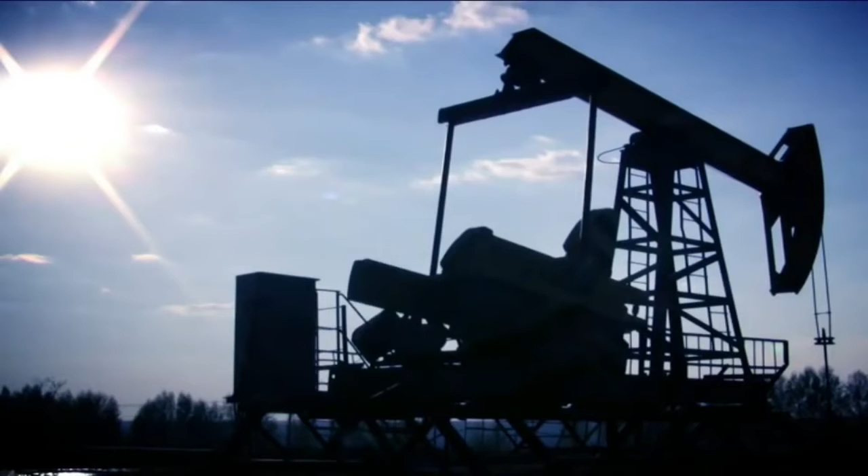Municipal solid waste management is recognized as a major challenge. Landfilling as the primary means of solid waste disposal is becoming a very serious problem and only represents a short-term solution. At the same time, we continue to overuse and rely on finite natural resources such as coal and oil. The burning of fossil fuels has also been linked by scientists to global warming.

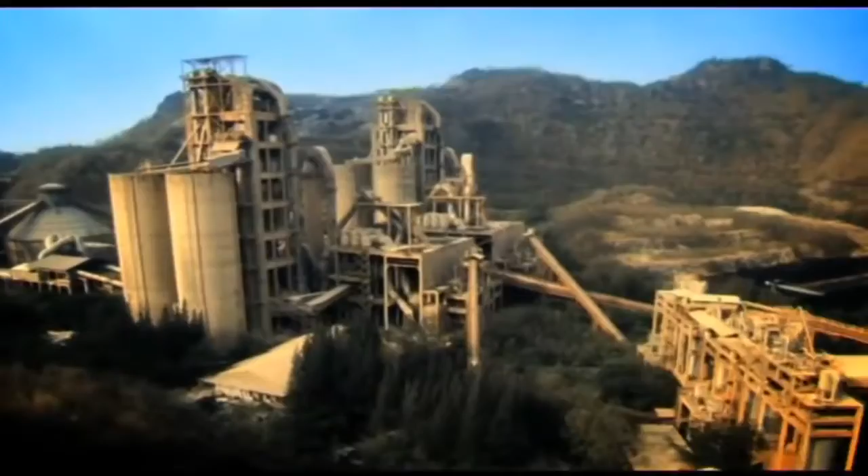Around the world, cement manufacturing accounts for about 5% of all CO2 emissions. This is a massive amount of emissions from the production of a single material. In addition, making cement is a very energy-intensive process.

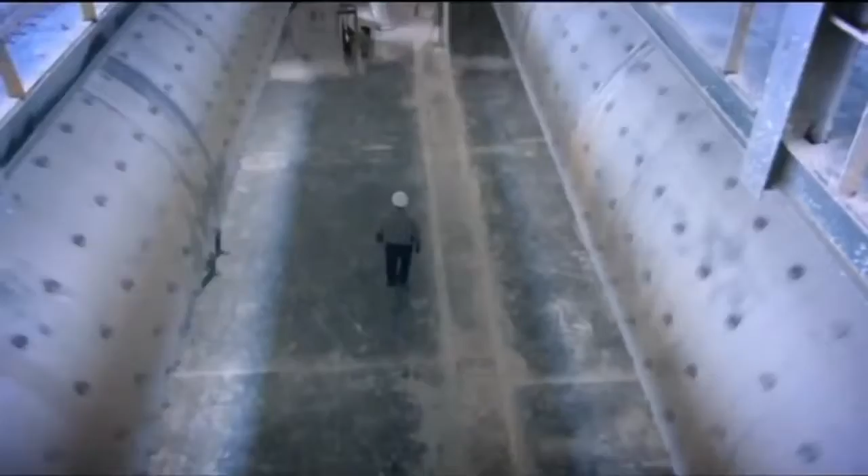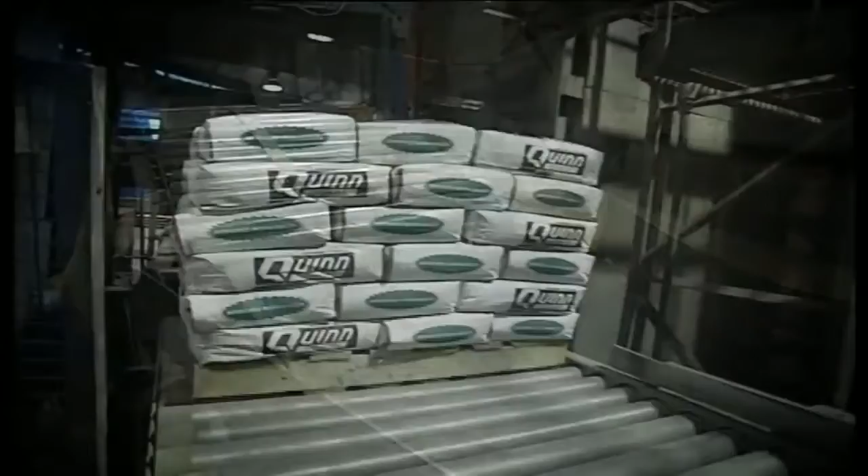Limestone and shale are extracted from suitable quarries, after which they are ground together before heating in a rotating kiln to 2,700 degrees Fahrenheit. A chemical reaction called calcination turns these raw materials into a clinker, which is then ground to form cement. The average cement kiln in the United States can use as much as 400 pounds of coal for every ton of cement produced.

Entsorga Italia offers a proven solution to our nation's solid waste and fossil fuel problems. After being collected by standard refuse vehicles, municipal solid waste will be delivered to an Entsorga facility, where it will be air-dried, sorted, and ultimately transformed into SRF, or solid recovered fuel.

Unlike other technologies, the Entsorga process requires no incineration at the facility. SRF can then be used by cement kilns and other industrial users of fossil fuels as a major supplement or in concert with coal.

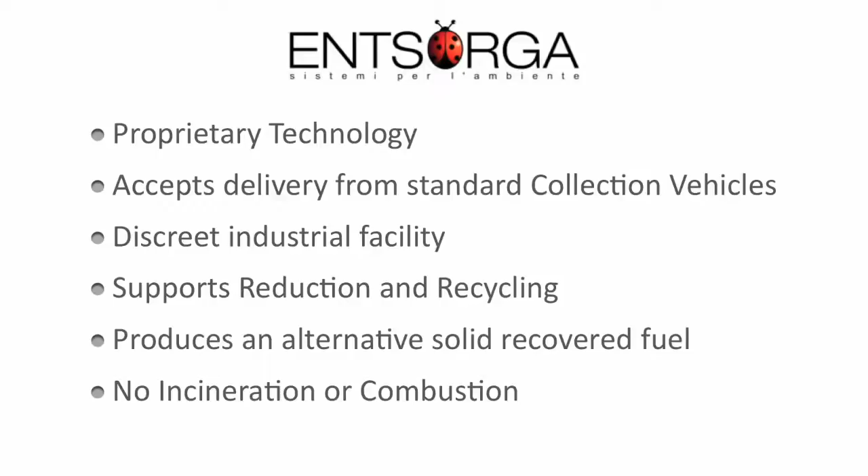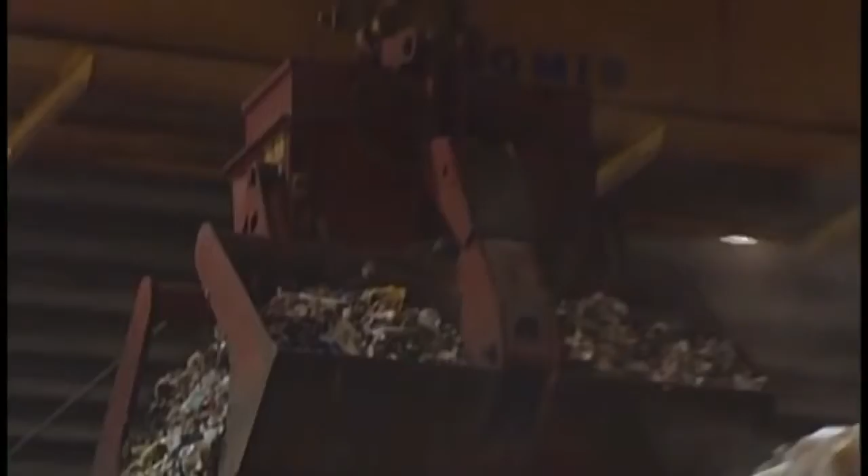Municipal solid waste is collected and delivered to the facility in a standard refuse vehicle. The waste is then moved throughout the facility by large overhead cranes. Air is circulated through the floor to dry the waste.

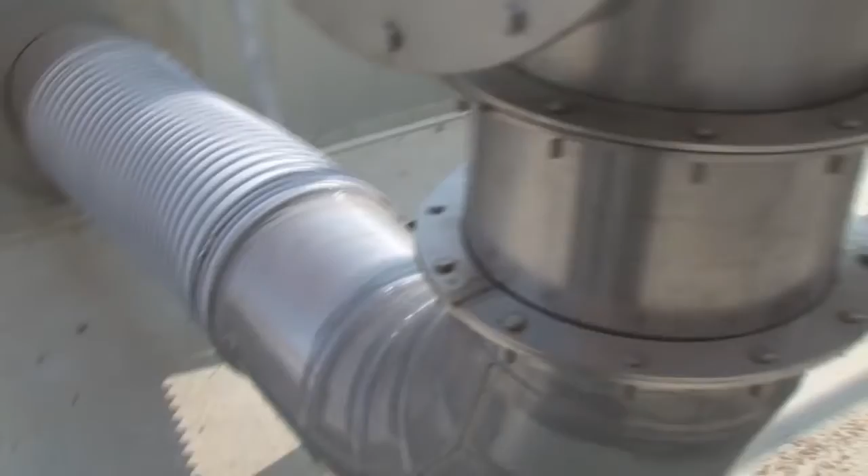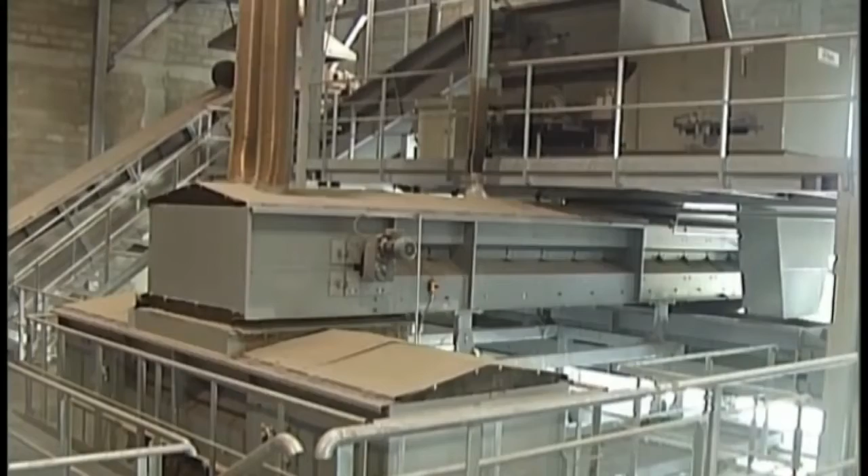Biofilters remove all of the odor. Recyclable materials including ferrous metals and aluminum are removed. The finished product is shredded to meet size requirements.

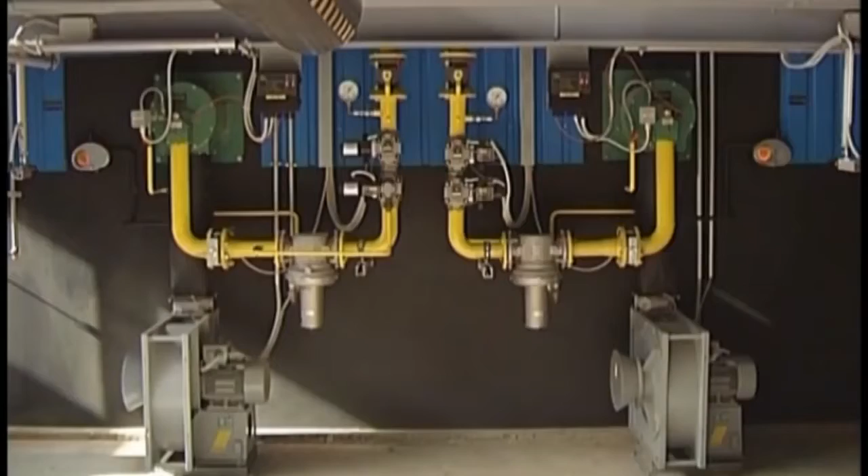The SRF is now ready for delivery to end users as a supplement or replacement for coal and other fossil fuels.

Now let's take a look at the production of SRF in more detail. The building itself typically looks like a large industrial unit and can be designed to blend in with the local environment. All mechanical equipment is contained within the building, and consequently, there are no problems with noise.

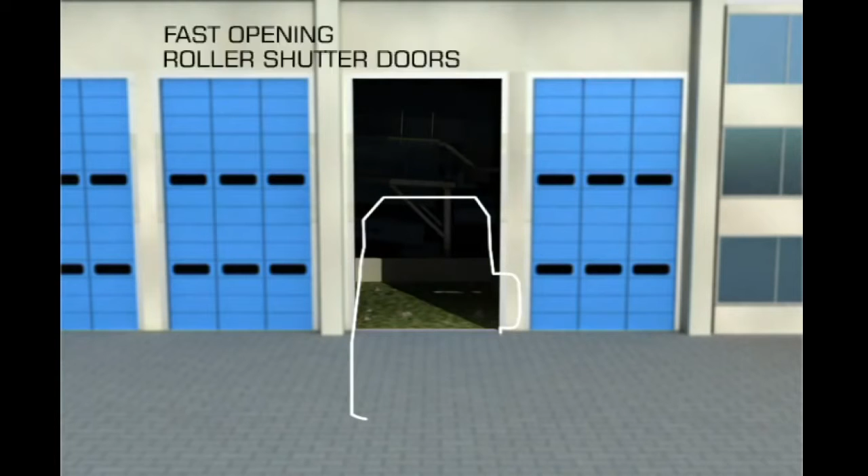The building has been designed to allow waste to be delivered rapidly. Fast-opening roller shutter doors allow vehicles to tip and turn around quickly. Waste is delivered to the facility in normal collection vehicles, where it is tipped into a reception pit.

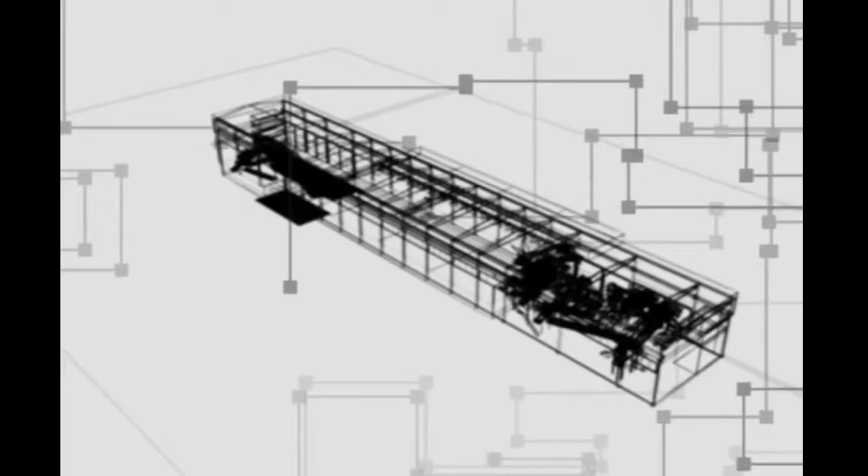The thing to note about this is that the building itself is always kept under a slight negative pressure, so that any odors arising as the waste is being tipped are drawn into the building and cleaned with the rest of the air. Once the waste is in the reception pit, the process of moving it around the plant is fully automated, thus removing the need for any operator intervention within the building.

This may not seem important, but it means that unlike other types of facilities, operators are not exposed to the elements inside the facility or endangered by heavy equipment moving waste around the facility.

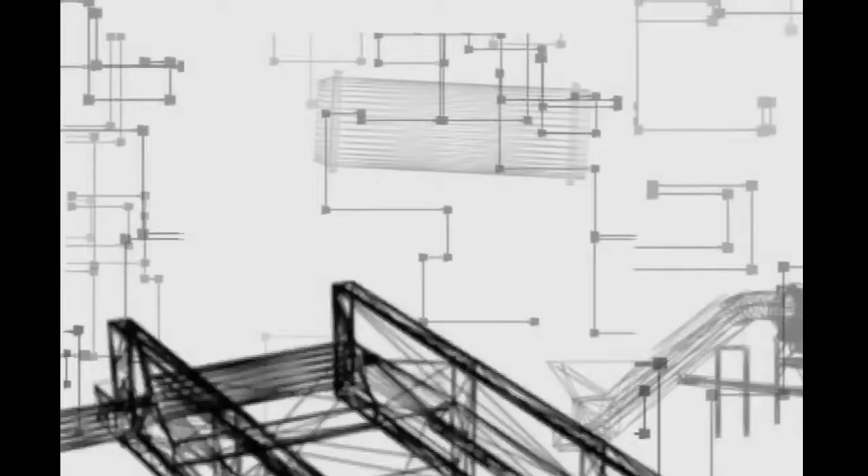The whole operation is managed from a control center, which dominates the treatment hall and from where all equipment is continuously monitored and controlled by computer with minimum intervention required from the operator.

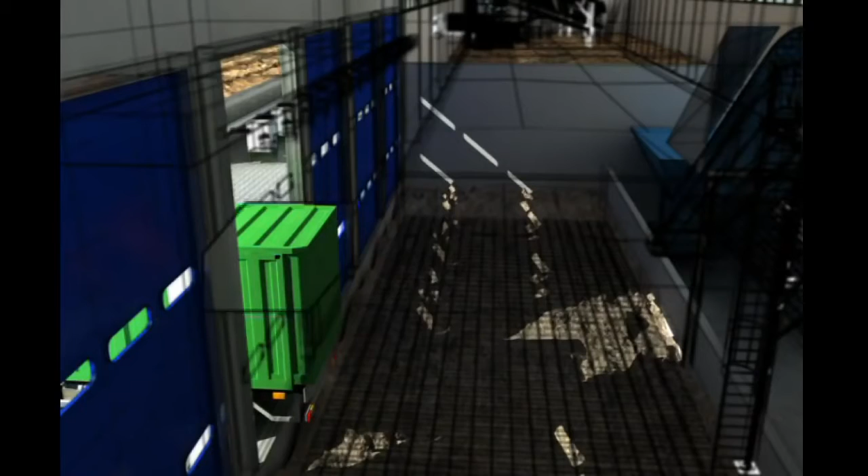Once inside the building, the waste is moved around using specifically designed overhead cranes. It is moved from the reception pit into a fast rotary screener, where the waste is channeled into two flows.

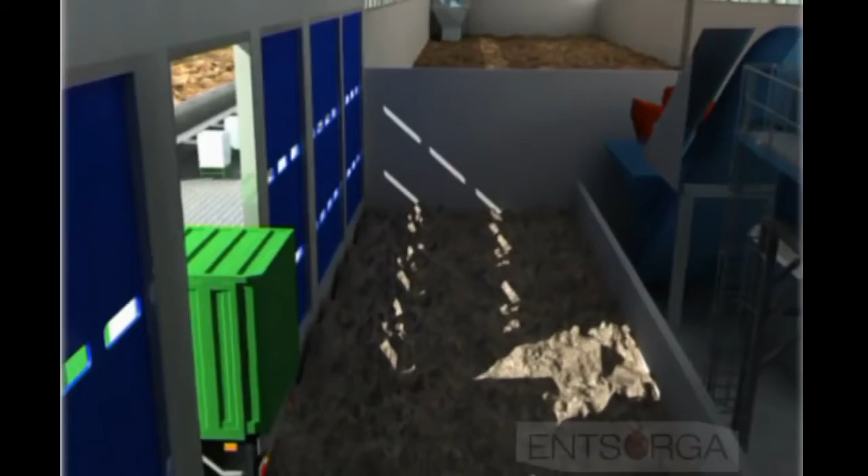Those items that pass through the mesh are undersized, and those that do not are oversized. At this stage, the undersized waste continues through the process, and the oversized waste, typically 10% of the input, is removed.

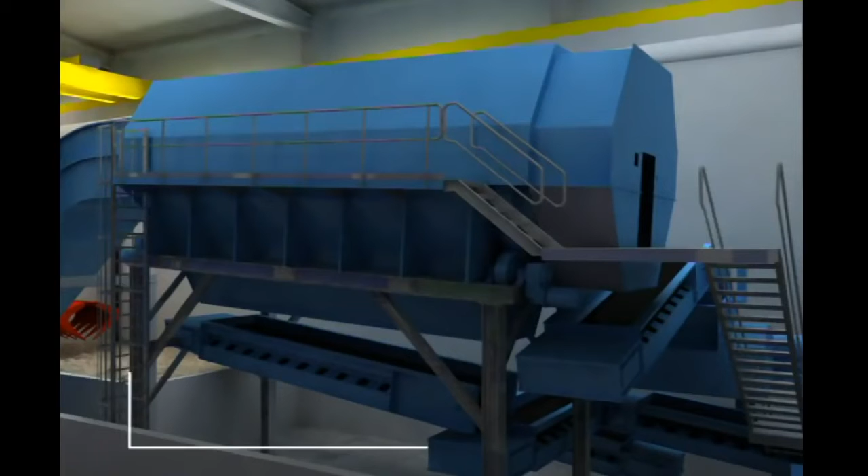This generally consists of plastic, paper, and cardboard that would play no part in the biostabilization phase. This waste proceeds directly to the refinement section of the facility. This method of preparation is not only the most energy efficient, it also exposes the maximum amount of waste to the biological process and improves the effectiveness of recycling in the refinement section.

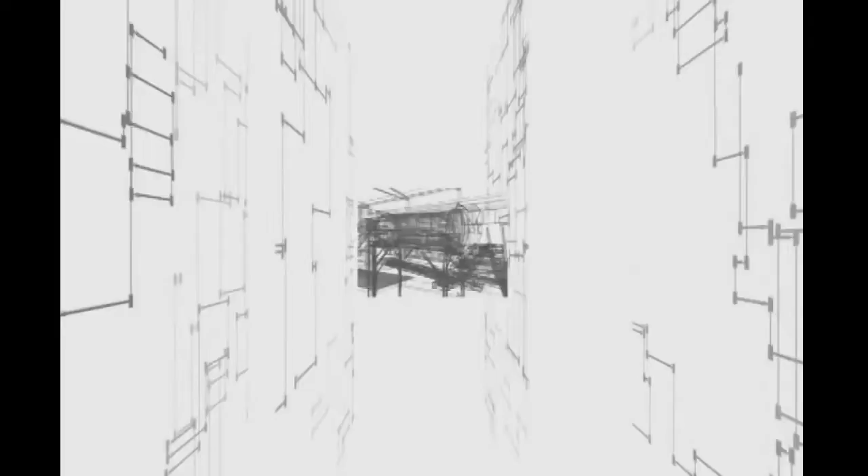Both the reception pit and the pit receiving the undersized waste from the rotary screener have a further innovation. Warm air, originating from the biological process, can be blown into the waste to quickly increase its temperature. This stimulates the biological activity at a very early stage in the process, compared to other systems, and is particularly beneficial in wintertime when the delivered waste can be frozen.

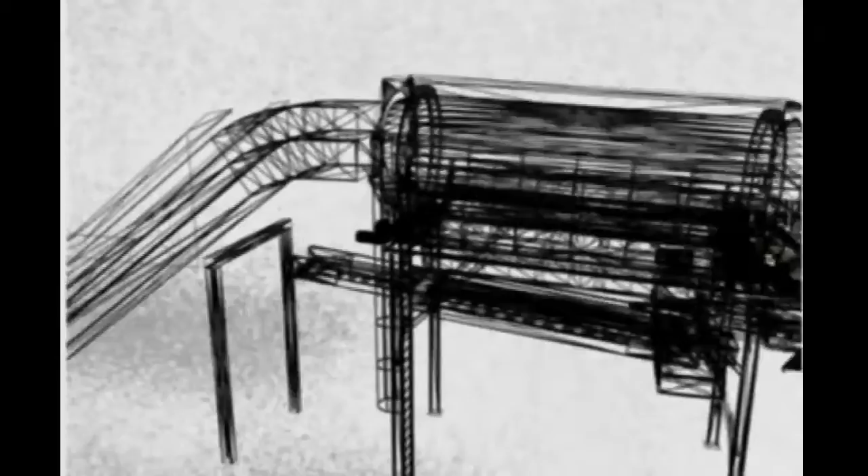After passing through the rotary screener, the undersized waste is then collected by the overhead cranes and moved to the biostabilization area, where it's placed in batches. The floor of the biostabilization area contains a specially designed ventilation system that allows air to be drawn or blown through the floor in order to supply the microbes in the waste with oxygen.

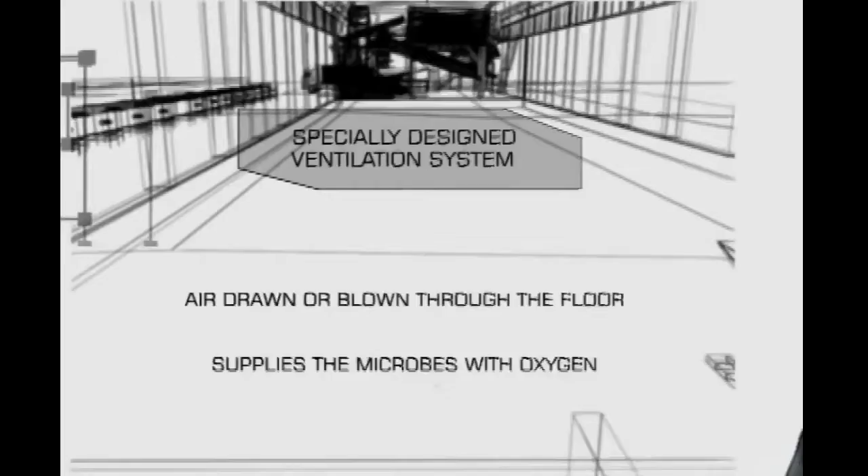The waste remains in these batches until it is stabilized, and the system controls the volume of air being sucked through the waste to maximize the decay. This takes 10 to 14 days.

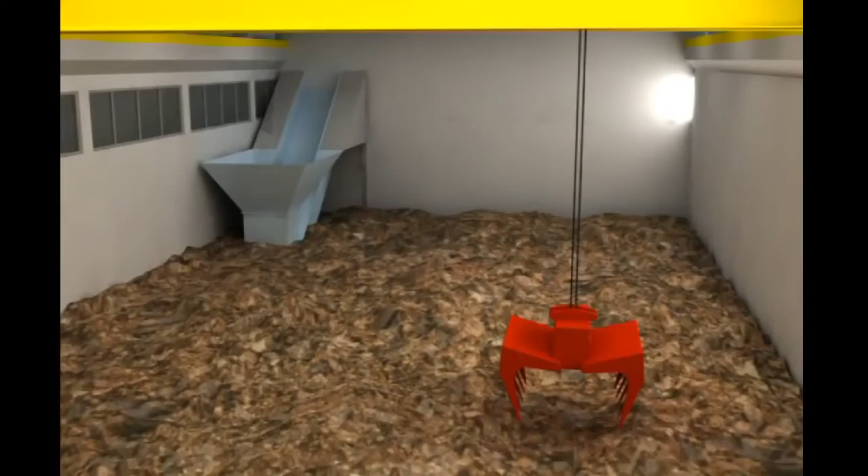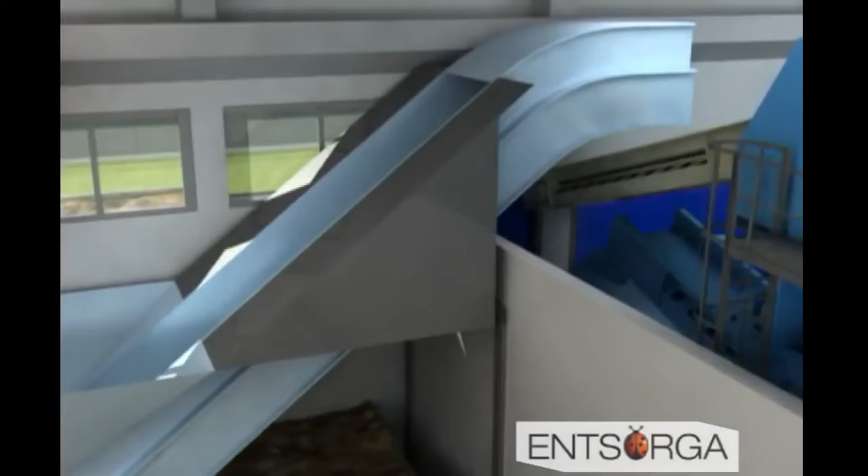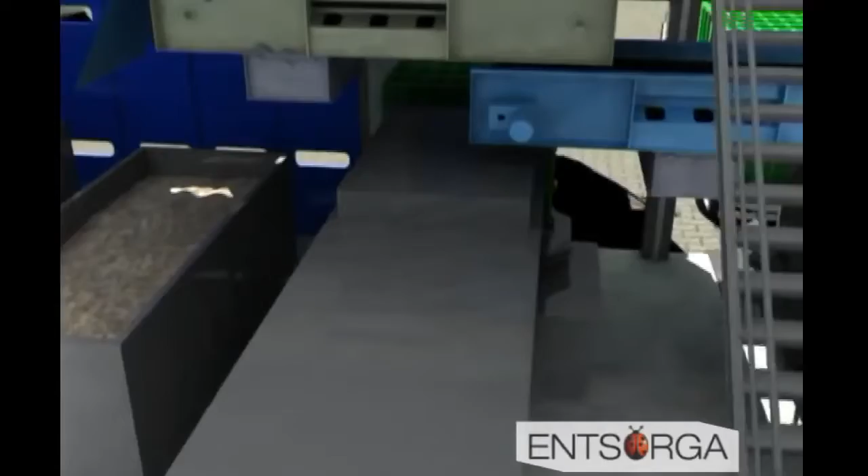Once the waste is dry, it is collected by the overhead cranes and moved to the refinement section. Here, a combination of electromechanical and magnetic processes sort and shred the dried material, extracting ferrous metals and aluminum, producing a solid recovered fuel, or SRF, suitable for use in cement kilns and a wide range of other energy recovery systems. All of the outputs from the plant are collected in standard containers and are removed for recycling or recovery.

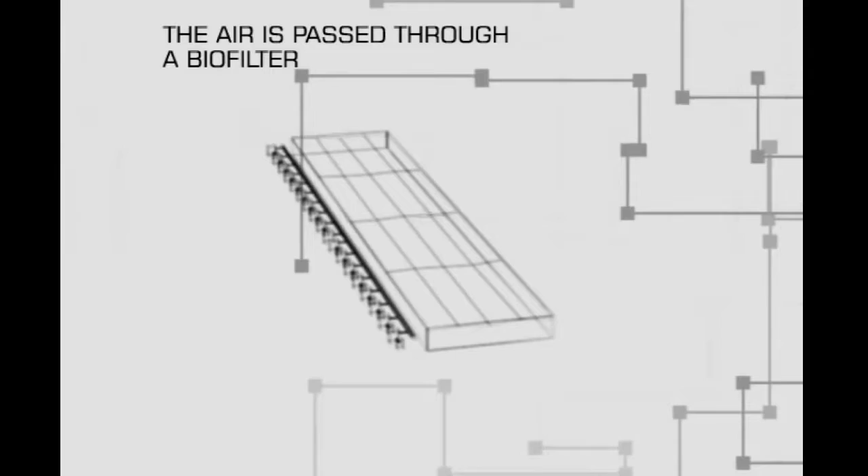Finally, all of the air from the facility is collected for treatment and dust removal. To do this, the air is passed through a large biofiltration system, typically made of wood bark or similar material, which harnesses natural microbes to remove odors from the air. If required, additional mechanical filtration equipment can be used as an alternative or supplement to the biofiltration system.

The Entsorga MBT process combines modern technology with clever design to provide a highly flexible and cost-effective means of treating residual municipal solid waste. In doing this, it delivers weight loss, recycling and recovery, and contributes towards waste reduction targets and diversion from landfill by harnessing natural processes. It does this with minimum impact on the environment and effective attention to health and safety, thus providing a modern, sustainable solution to waste management.